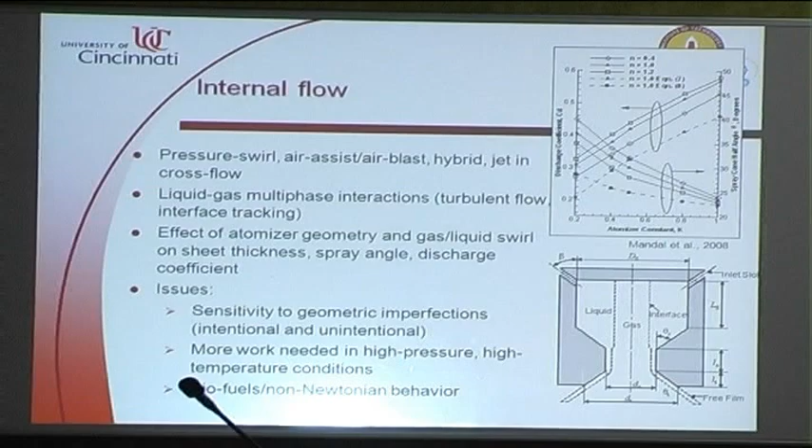For example, I did some work with SC Johnson. This is a consumer product company. They make Windex glass cleaners and mosquito repellent sprays and all consumer applications. And of course, their requirements are very different. They don't really care about spray angles, because when you're spraying Windex, if it doesn't cover the first time, the consumer can spray it again. So it's not a big deal for them. But they do care a lot about droplet size. You don't want that stuff to bounce off the glass. You want it to stick there and clean it.

So very different requirements. The pressure differences they work with in a tiny mosquito repellent bottle are very small compared to what you would see in gas turbine fuel injectors. But again, some of this information could translate easily to develop atomizers that were small scale, operating under small pressure differentials, but would give small droplet sizes and so on. So some of this will also translate to other applications.

And again, some issues here. Yesterday, Professor Raghunandan talked about elliptical jets or elliptical geometries. Again, change in geometry, either intentional, such as making it elliptical to make it more unstable, or unintentional, where manufacturing defects or assembly defects can cause certain asymmetries, and then you have to identify those. So looking at both of those and seeing if there are any imperfections that we can put in intentionally to get better atomization.

Professor Collicutt yesterday mentioned diesel injectors, how different types of step geometries inside really change the atomization. So even here, some of that can be looked at. So there are certainly opportunities to extend this.

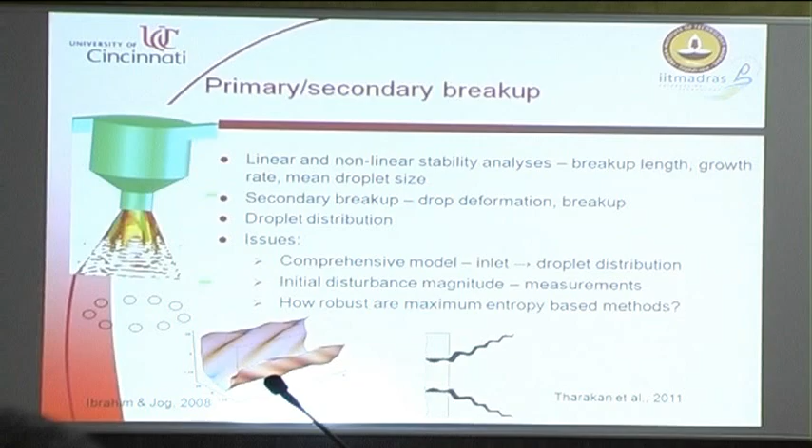Once it changes breakup length, it changes the ligament thicknesses, then what kind of droplet sizes you would predict, and so on. So what is the best way to correlate this? That's certainly open. Perhaps through measurements. We have some measurements available in terms of cylindrical jets going very close to the nozzle exit to look at how these waves propagate and increase, and then to look at the growth rate of these waves. But in general, for different kinds of atomizers, I don't think we have that yet.

There is one paper, I think, coming out in JFM that has done some measurements like this, looking at different frequencies of waves for an annular sheet. But of course, another problem we have with an annular sheet is we can only see it from outside. What happens at the inside interface is very difficult to see. So that's certainly an issue. John Tharakan and myself have done modeling of this nature. So this certainly needs to be addressed.

Going from there to droplet distribution, I think there are more questions. This is, at least in my opinion, the weakest link in these modeling efforts. How robust are these? Because sometimes ad hoc constraints are put into these methods to get the right type of distribution. Is it the best way to go? Would assuming a certain type of, say, Rosin-Rammler distribution, and then trying to correlate those parameters to some physical conditions of the sheet, be a better approach? I think these are open questions to look at.

Let's just get going with what I had in mind as far as experimental aspects are concerned, testing issues that I thought were of significance. The basic idea is, in IC engines, they make lots of injectors. Therefore, they want a way to quickly test these injectors as they produce them. Whereas in gas turbines, the numbers aren't so large, and typically it's very easy to test these things when doing cold flow atmospheric pressure tests, whereas the actual conditions are quite different.

So many times it's easy to start with atmospheric pressure cold flow tests, but then there are a number of questions that arise. So it would be nice if we can actually think about some of these issues that have been plaguing us, in fact, for quite some time, but no conclusive answers exist on these things. So what I would like to do is to see if we can come up with some sort of a

systematic approach to this. So the question essentially is, what's the relative importance of the ambient pressure in which the injection is done versus the injection pressure alone? Then the effect of fuel and air temperatures, and the use of fuel surrogates, the impact of air swirl flow or cross flow aerodynamics on the atomization, simultaneous diagnostics of spray and the surrounding airflow, and what data is needed for modeling or validation.

In fact, I would like to actually look at the testing aspect in two or three different ways. One, to produce data for validation of models. Second is to produce data for input to models. And third is to investigate new phenomena that the models can't do anything about. So in that regard, we have to actually look at what objectives we have to carry in our experiments with regard to modeling.

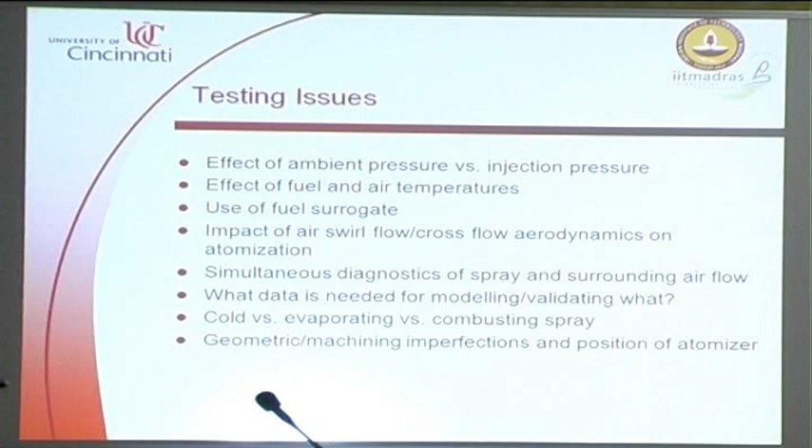And of course, there's another issue about cold flow. Milind was talking about getting good insights with cold flow sprays, but then you can also take the next step of evaporating sprays or then going all the way to combusting sprays. He mentioned that the realistic conditions are different, so we have to think about these. And then he also mentioned machining imperfections or small geometric variations.

So many times, I'll explain all these things. So in the next upcoming slides, we will just go through. Which one? Those arrows. Okay, yeah, sure.

So as I mentioned, as far as the ambient pressure is concerned, it's easier to do the atomizer testing at atmospheric ambient pressure. I used the word testing because many times atomizers are just tested. Somebody makes a design and then comes and says, can you tell me what the spray size is? It's as if we are like a shop. That's typically how it works. But atomizer design is a completely different story. We will be talking about testing, experiments, diagnostics, these words a bit interchangeably, but they have different connotations.

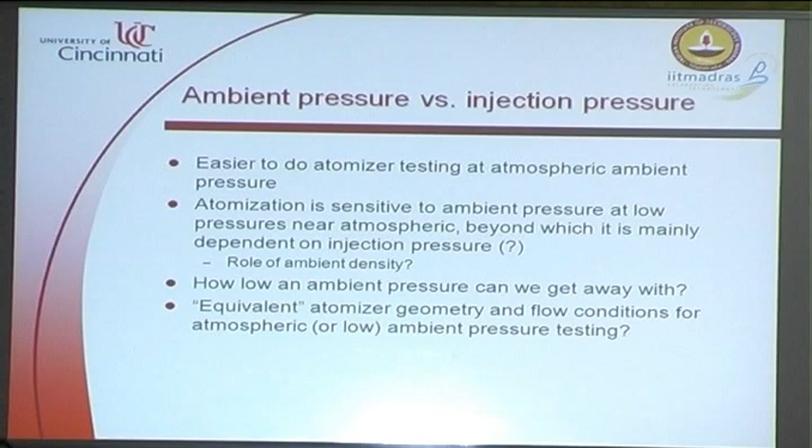So it's easier to test, as I said, at atmospheric pressure. Then what we find is the atomization is actually sensitive to ambient pressure up to a certain pressure, so maybe relatively elevated pressures, but not necessarily the actual pressures to which you need to go, beyond which the injection pressure is what matters, or the delta P across the injector. So the question is, ultimately, how low an ambient pressure can we get away with, because the setup rigs in the experiments can be scaled down correspondingly if you are targeting lower pressures.

The question is essentially, is it the role of ambient density that the ambient pressure causes? A similar question will arise with respect to temperature. And the other question again is, if we are doing atmospheric pressure tests, are there equivalent atomizer geometries that we have to consider that will give about the same spray performance? So the next issue is temperature, and I'm clubbing these two for want of time. We can condense these slides.

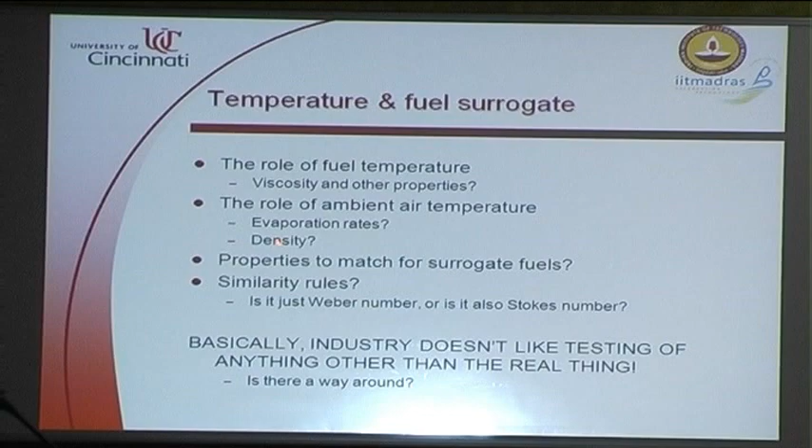When you talk about temperature, there are two things. One is the fuel temperature, the other one is the air temperature. The fuel temperature influences the fuel properties, viscosity and other properties, whereas the ambient temperature could directly influence evaporation rates, as fuel temperature would as well. We talked about density effects, which pressure does. Similarly, temperature would do so as well. So the question is, what is that effect on the atomization?

And similarly, when you're looking at viscosity and other properties due to temperature, you can also look at matching some of these with surrogate fuels, because many times when we're doing these cold flow non-reacting spray diagnostics, we are very concerned about safety in the lab. We are much better off actually burning the stuff away because we are very sure that it is consumed, whereas if it is just going to cause a mist in the lab, that's not very good. So the disposal of the spray is a big concern. From that point of view, surrogate fuels would do a lot better. The question then is, what are the similarity rules?

Is it just like a Weber number similarity that we have to look at? But what about Stokes numbers, local Stokes numbers versus global Stokes numbers? These are issues that I thought we should think about. Bottom line is, the industry does not like testing anything other than the real thing. This is a big pain, to be very honest. Okay, so we need to get a little bit smarter about this. That's essentially what I'm saying.

So the surrounding airflow is a huge issue actually. So for example, this is the Kaveri engine atomizer. You can see the atomizer in the middle, and then there is an annular swirler. That's a typical arrangement. Now, we did atmospheric pressure tests in our lab without turning on the surrounding co-flow. This is an air blast atomizer, so we got the injection pressures right for the liquid, and we also got the air pressures going through the atomizer right.

All those things were fine. But we did not turn on the airflow in the swirler around. We simply get the liquid to dribble at atmospheric pressure. Right? So the atomizer simply did not work if you did not have the surrounding swirl flow. So similarly, we did this experiment for Money when he was at Saint-Gobain. We did this for a spray in cross flow, and then we tried to compare the atomization with and without the cross flow that's obtained with a wind tunnel or a free jet from a tunnel.

So the point essentially is, the typical attitude or approach, attitude may be a stronger word, sorry. The approach in the industry for quick calculations is, you give me the SMD data, I will just plug it in at the inlet to the combustor, and then I'll track it in a Lagrangian manner. Okay, and then of course the sizes are going to change a little bit. Do you really call that atomization? Right? That may not necessarily be atomization. That is just like redistribution of the droplets. So there is a significant amount of secondary atomization that goes on because of the surrounding airflow, which probably is not taken into account in most modeling in a Eulerian Lagrangian framework.

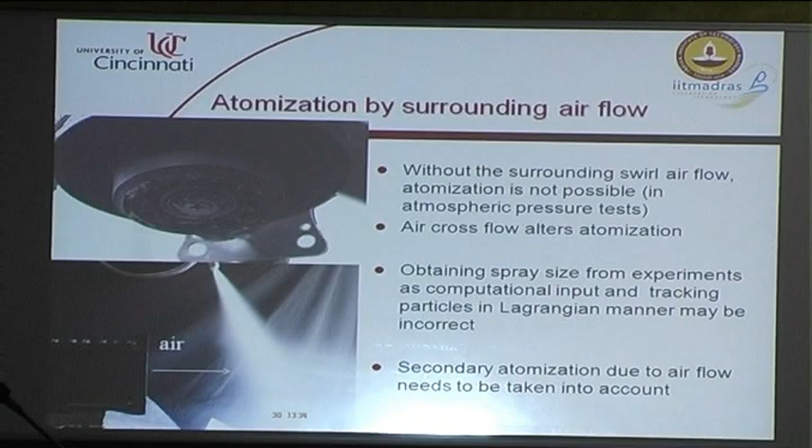The most important thing in my mind as far as diagnostics is concerned, moving away from testing, is what do we do to actually look at the airflow that's around the spray, particle for particle. That means you're looking at spray particles, the droplet particles. Surrounding it, there is an airflow. Can we actually track both? So measuring spray particle and airflow velocities at a location is required. It's a very interesting thing, because you can actually get phase interface shear, which is pretty interesting for interface tracking, model validation under turbulent conditions.

And the question is, what about the methods? Okay, how do you really do this? One possibility is we say, okay, spray actually scatters a lot by Mie scattering, so the Mie scattering intensity is very high, whereas if you now preferentially seed with much smaller particles, narrow cut distribution for the air, you can threshold, but there are big issues about that. Then is it possible for us to look at a simultaneous PLIF and Mie, and then use the PLIF for the spray velocity versus Mie? So again, there are issues associated with this. So this I thought was a very important thing to do.

So the other issue that I raised was, what exactly are we looking for from experiments with regard to models, right? So the most popular thing to do is PDPA. So PDPA is like a behemoth. You just get this, and then you say, oh, I got PDPA, and then you start doing things. But you get data that's reliable only slightly away from the nozzle, but pretty much that's history. I mean, everything has happened there. We are really looking at the after effect, strictly speaking, right?

So what about data closer to the nozzle? How do you actually approach this problem? And it's not as if nobody has thought about these things. Things are going on, but we have to firm up the ideas about these things. So for example, is it possible for us to statistically quantify ligament shapes? Okay, I'm talking about shapes, not just sizes. All right. This is because there is a person who does modeling, and he shows all these nice ligaments like what Milind was showing, and then he finally tests PDPA data further downstream and says, yes, I got it right.

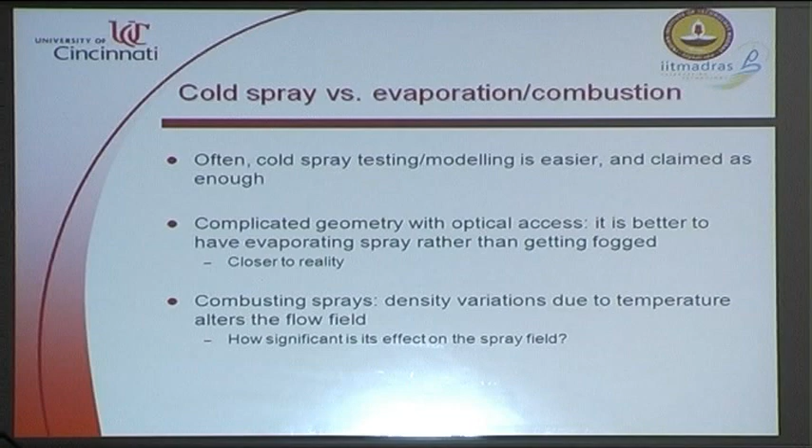So, are we better off dealing with evaporating sprays right away instead of cold flow? In that case, what about the volatility, right? We now have to come up with a surrogate fuel which is a bit more volatile than the actual fuel and so on, so you get into problems there. Combusting sprays, as Milind pointed out, have density variations due to temperature that alter the flow field and therefore the spray field. So that of course is a reality which we would like to test, but what about understanding? We can't do the real thing completely.

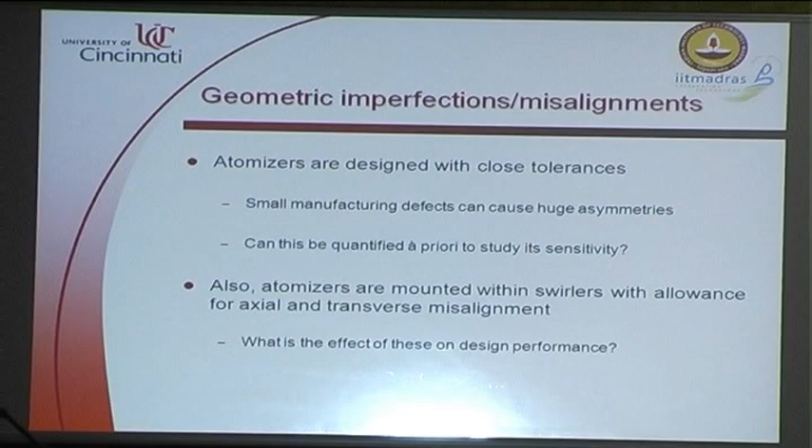Finally, the last part, atomizers are designed with very, very close tolerances. It's a very interesting trade. Small manufacturing defects will cause huge asymmetries. 10 years ago in IIT Madras, we had a seminar, and the late Jerry Faeth came here and made this statement that is in my mind all the time. He probably learned it somewhere else. He said the atomizer is the kingpin of the combustor.

So basically what it means is you slightly turn the atomizer this way or that way, you can get rid of a hot spot here, or get NOx to come down and so on. So you have a very fine control, in a way that we don't understand, with the atomizer, and small imperfections can cause huge asymmetries. The question is, is it possible for us to quantify this sensitivity a priori? So there must be testing as well as some sort of anticipated CFD done in a systematic manner to anticipate the sensitivity, right?

And then we also know, for example, that atomizers are mounted within the swirlers with allowance for axial and transverse misalignments. We go through these things in our lab all the time. When you're mounting the swirler and then the atomizer, they are not really fastened together in any manner. You just insert the atomizer there and let it be. So you could have the swirler here and the atomizer this way, that way, axially, or a little bit off center as well. So what about these effects on the design performance? Are we really quantifying these things?